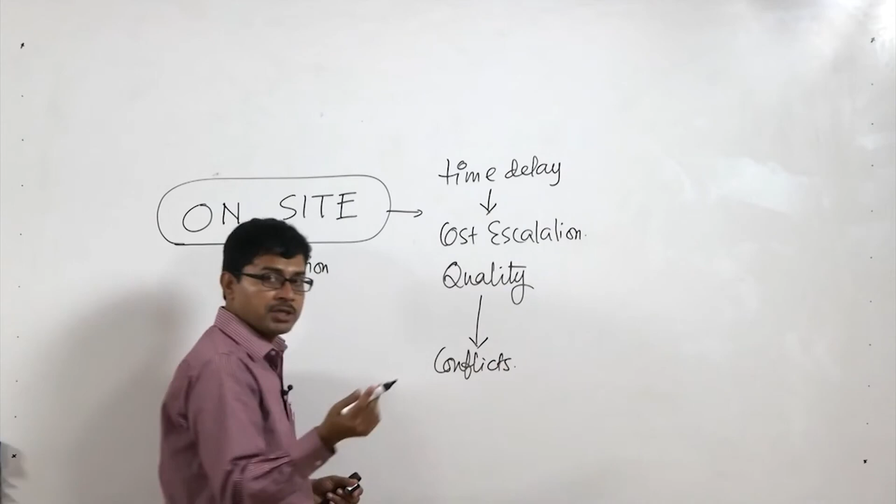Another very important part is that since it is site based construction, the quality of the product, the quality of the housing, is also compromised, because on site construction is based on the actual availability of labor and their skill level. So, these are the issues, and sometimes it also leads to conflicts between the end users and the developer, and dissatisfaction.

As a response to this problem, one of the solutions is to convert this on site activity to an off site model, where the major construction takes place in a factory in terms of building components. Every component of a house is manufactured at the factory under a given design prescription, and then transported to the site and assembled on the site.

And the major difference is that in on-site construction, some of the activities are not possible during the rainy season, and it is prone to weather. You cannot construct a house in a rainy season or in very extreme weather, but if it is off-site construction, then you do the manufacturing at the factory, and then you come to the site and assemble in a suitable, convenient time.

So, in short, you achieve the time, and if you achieve the time, the cost and quality. Why quality? Because if it is done at the factory, it is a standardized product, it is done in a standardized and more monitored process. So, it ensures the quality as well, and as a result there will be more satisfaction, and dissatisfaction will be resolved.

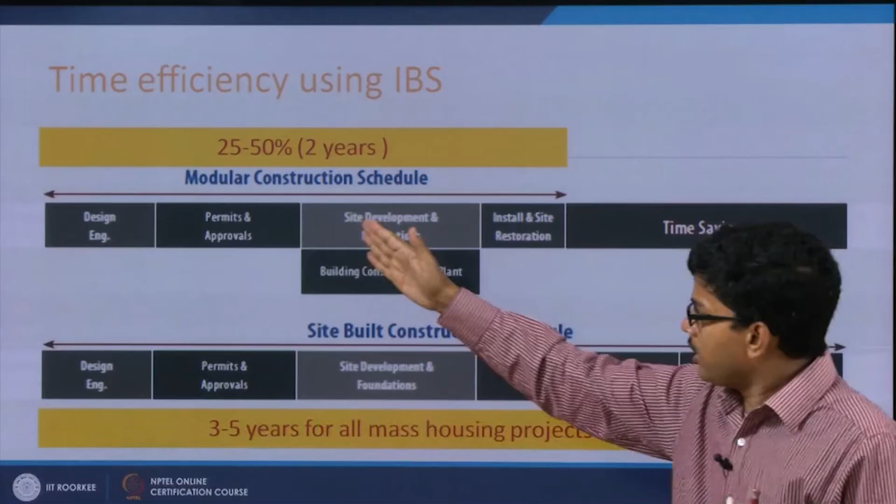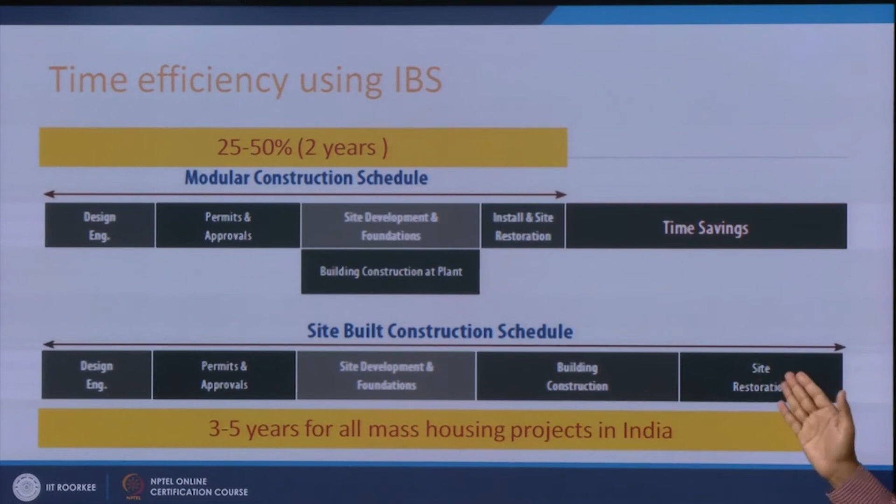So, the major advantage of this construction is basically the time savings. In a typical site-built construction schedule, you have the permit and approvals, then site development, then building construction and site restoration. Building construction and site restoration take a long time, basically 3 to 5 years in India, whereas in modular or off-site construction, you just need a little time to install and for site restoration.

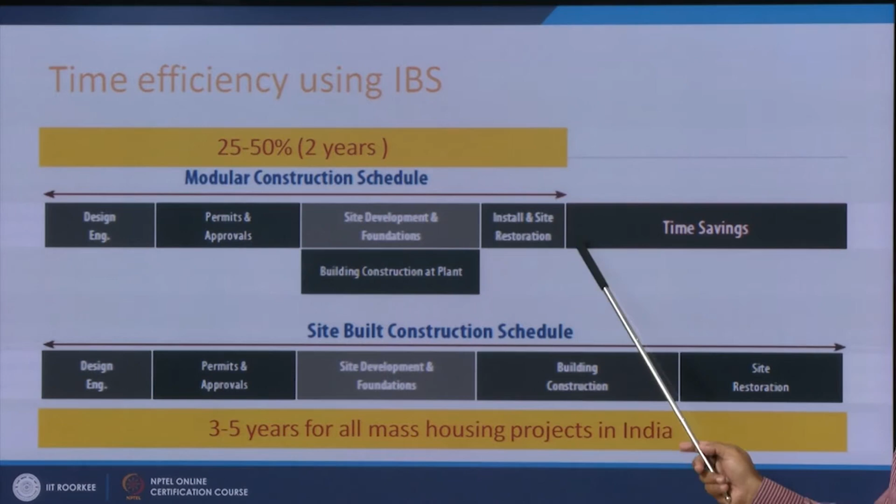So, this is the time savings for typical off-site construction, which we are calling an industrialized building system, which is nothing but incorporating the industrialized system at the off-site location or factory, and then bringing the product or component to the site and assembling it for faster delivery of housing. So, to understand in a better way how it works and what can be done for India, let us understand how it works technically.

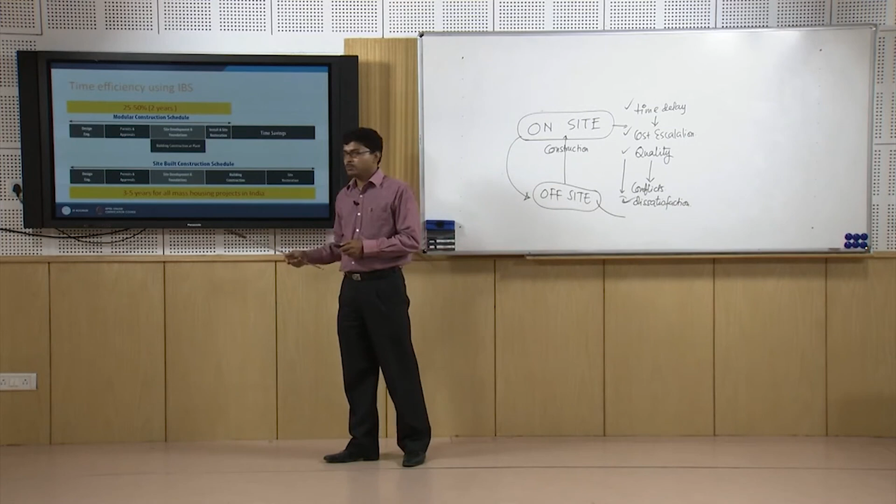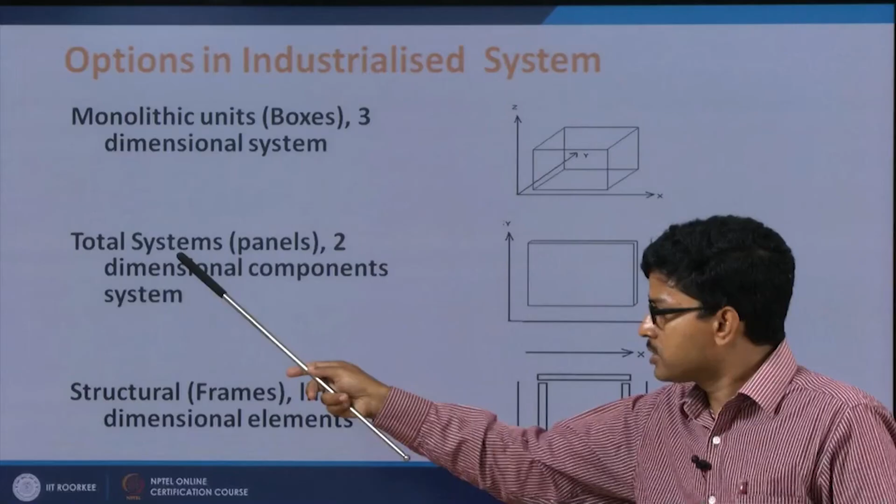Now, since housing is a building and a 3-dimensional object, it can be analyzed in 3 ways. One is that we consider each room or unit as a box, which is called the monolithic, box, or 3-dimensional system. Another approach is that to make an enclosed space, we consider each wall as a panel, which is called a panel system, and which is basically 2-dimensional if we ignore the thickness for convenience. It does not enclose a space fully, but multiple panel units can enclose a space in a better way.

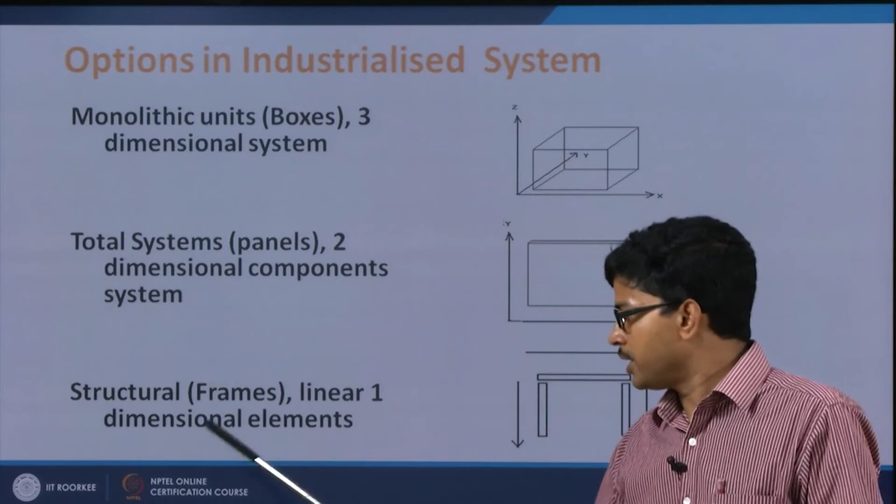And also the traditional way of constructing a house, with columns and beams making a structure, where multiple columns and beams create an enclosed space, which is called the frame system or linear system, basically a linear 1-dimensional component. So, in an industrialized system we can use any of these approaches based on our situation. Now, let us see which will be suitable or useful for the Indian case.

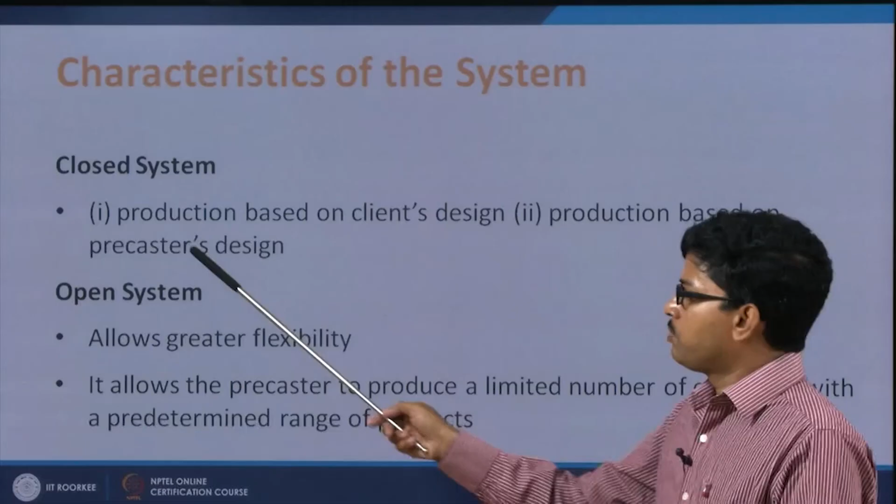Based on this system, there are two different characteristics which influence it: closed system and open system. In a closed system, the whole design, standardization and construction is done by only one provider or manufacturer. The production can be based on the client design, meaning a client provides a design and a manufacturer produces that housing from design to construction and delivers it to the client, or it can be based on the precaster's or producer's design.

Sometimes the developer, producer or precaster designs, constructs, manufactures and supplies a product to the market, and based on the market situation people can buy directly. So, these are closed systems. The characteristic of the closed system is, if I as a precaster or producer develop a module or product, no other company or manufacturer will be able to monitor, modify or enhance that product.

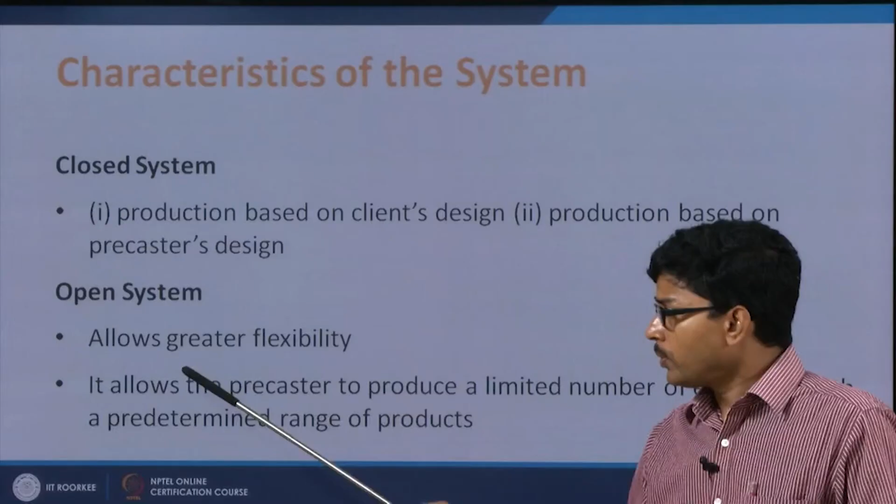So, it is closed to other agencies, whereas in an open system, on a common standardized platform, many companies can participate, give their products, and those products can be assembled.

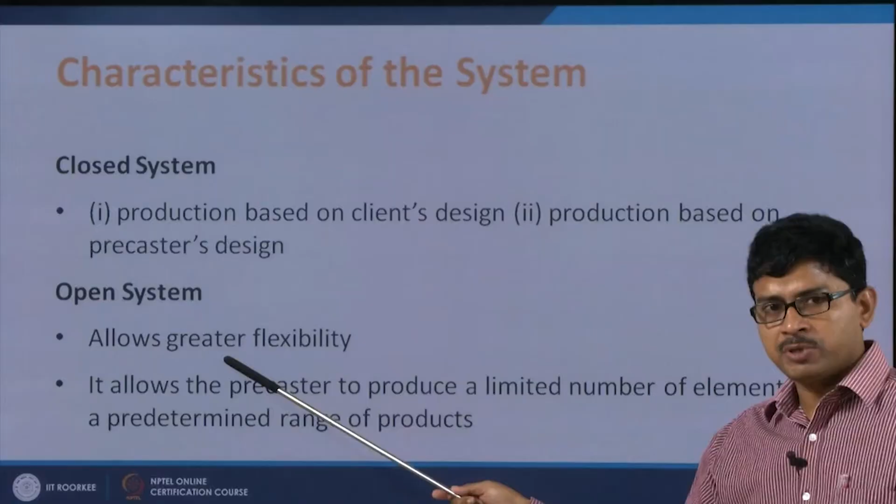It is like an assembled computer, where on the basis of a common format the components from various companies are assembled and integrated for a particular purpose. So the open system allows greater flexibility, and it also allows the precaster to produce a limited number of elements with a predetermined range of products, because the open system involves integration of multiple agencies, multiple manufacturers and producers.

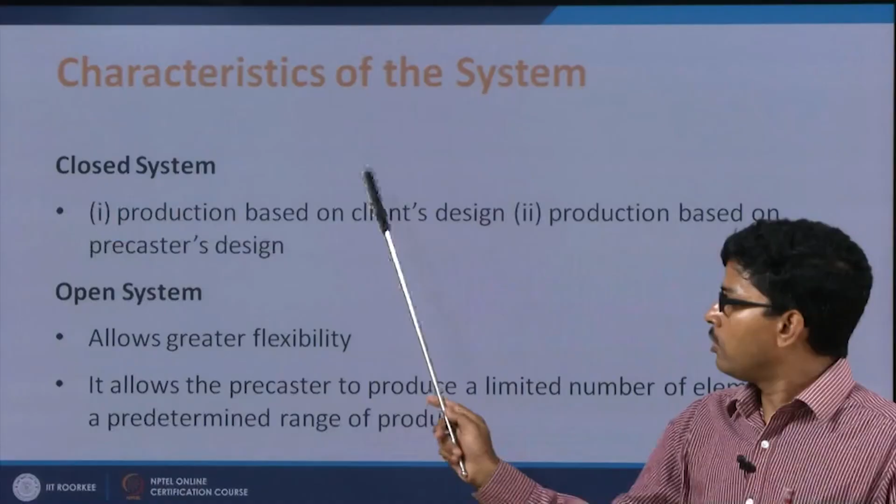So many numbers may not be possible, a limited number of options are possible, and compatibility is the issue, but the advantage of the open system is that it offers flexibility and it doesn't encourage a monopoly. But since the closed system is dependent on either the producers or the client, it encourages monopoly, and it is dependent on very few, one or two large developers or manufacturers. But in the open system many manufacturers, second category, third category, fourth category, small, medium, large and very large developers or producers can participate and develop housing.

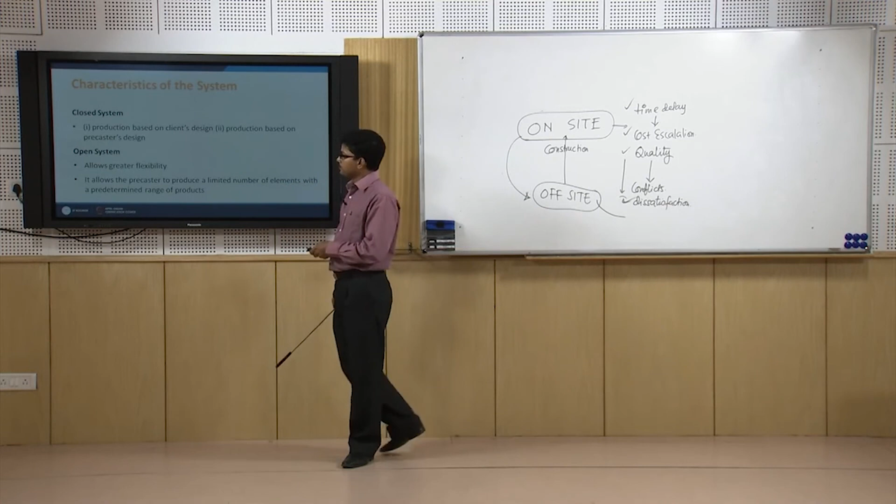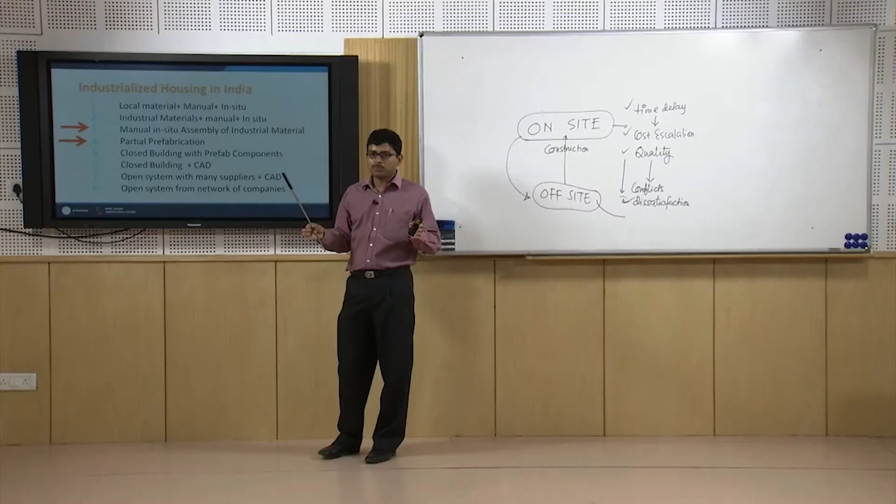Now, in an industrialized or offsite-based system, there are several stages required for a country like India. Initially we start from local material and manual construction on site, and then slowly we go to using industrial material with a manual process in situ. Then we move to manual in situ assembly of industrial material. That means the process is manual, but we are assembling industrial material. Right now in projects the overall process is manual and site based, but we are using some industrial materials, fixtures and finishing, like steel, plumbing fixtures, flooring elements, windows and doors, which are manufactured in industry. We are using them, but in a manual method.

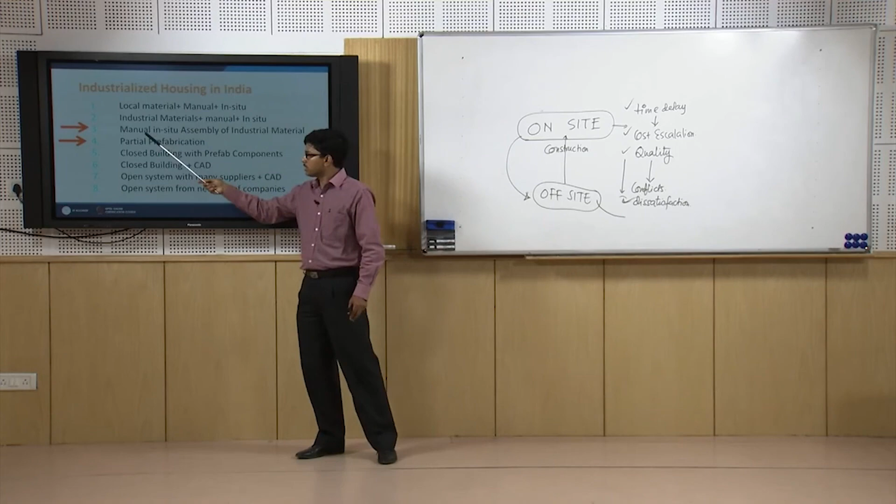The next stage will be partial prefabrication. Partial means some of the components, like walls, columns, beams or slabs, will be prefabricated, some parts will be done on site, and maybe fixtures and finishing will be done on site. So this is called partial. Right now we are in this position in India, which is a combination of manual labor, on-site construction, and some amount of partial prefabrication. We will show the example next day.

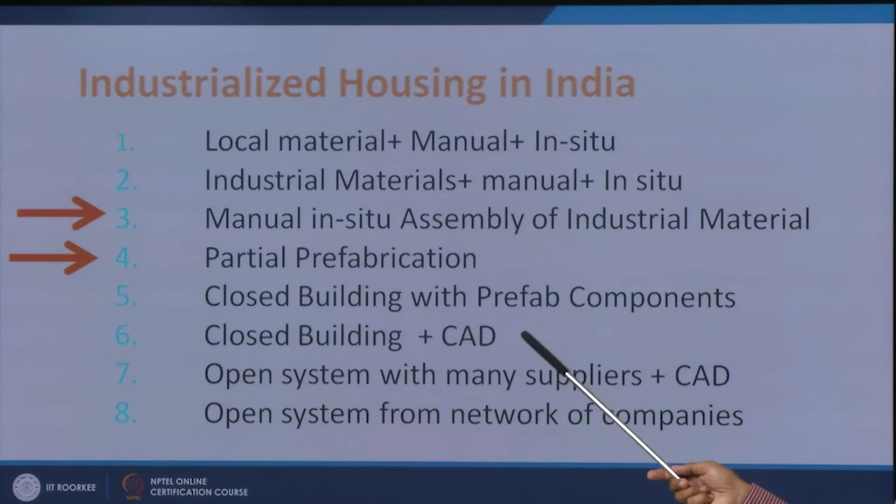The next stage is the closed building concept, or closed system with prefab components, where one, two or a few developers or producers can come forward and develop the whole package of housing in an industrialized mode. That means the whole houses will be manufactured in the factory, supplied to the site on time and assembled, and that is possible in the desired quality if done in a closed building system. The closed building system needs integration with computer aided drafting and design, which will lead to greater flexibility of the components integrated in a given platform and dimensional format.

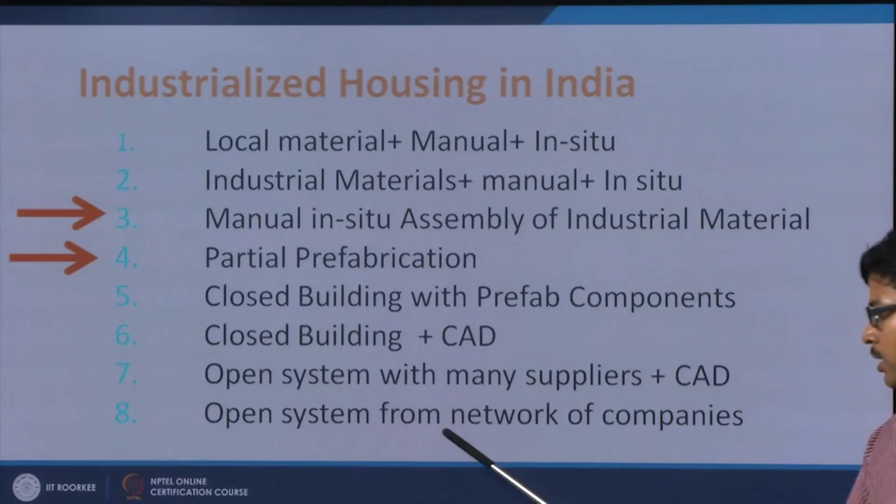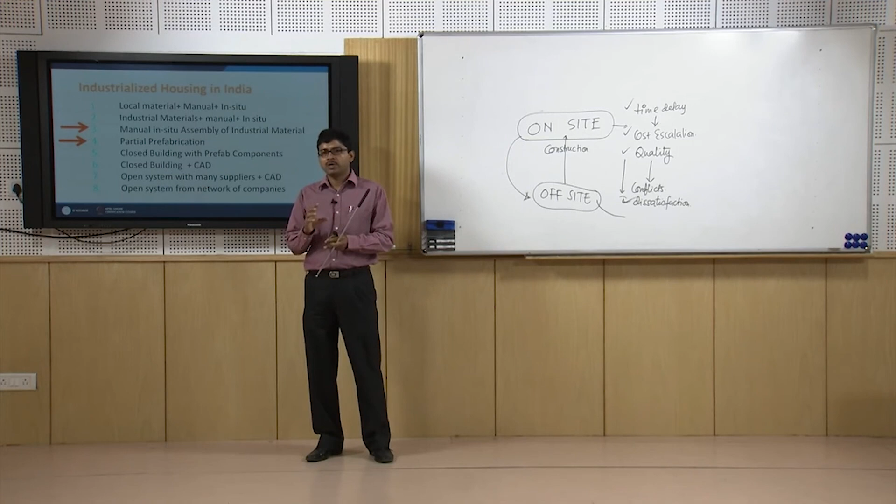After that, the open system with many suppliers, applying CAD across a network of companies, can be achieved. These are further stages which some countries have achieved. In these stages many suppliers and precasters work in the market, and various housing typologies are available that need no more than 2 to 3 months to execute on site, and they are cheaper, affordable and very quickly constructed housing options.

But what do you need to have this industrialized building system? There are various prerequisites - some of the prerequisites are on site, some conditions required are off-site, which is beyond the boundary, and some are prerequisite policy.

I start with the policy parameter. To enable this kind of construction we need availability of bigger land. Sometimes we are talking about mass housing, and for mass housing bigger land is required. So if we change the technology from conventional to new technology, land is a very important input. Then there's the private investment possibility - there are very few developers interested to invest in the prefabricated or industrialized technology.

So private investment is required, and for that we need a policy paradigm by the government. Right now the present government is encouraging the industrialized building system and the prefabricated system largely. There are various developers coming forward to invest in this sector. I will give the example later on.

Whenever there is a change of technology, there is a need for quality control. For this quality control we need building codes and an inspection mechanism to ensure quality. So a new set of building rules, building codes, and a new control mechanism needs to be developed.

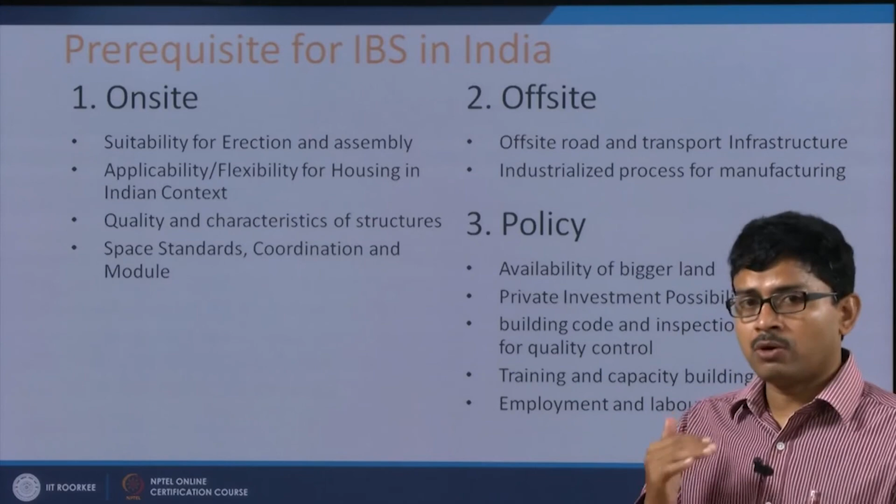Quality and characteristics of the structure should be durable against all weather effects - the hot season, winter season and rainy season. It should be able to withstand natural disasters like flood and cyclone, and seismic threats. So it should be durable considering all the major threats.

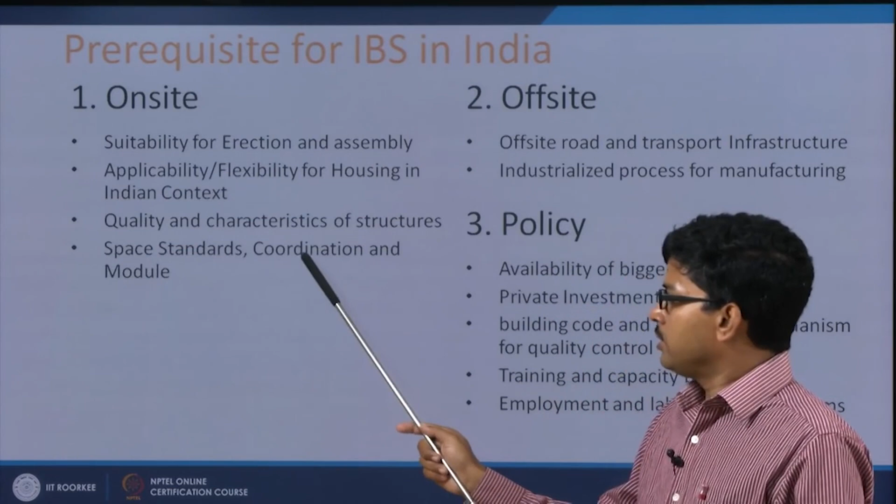Also space standards and dimensional and modular coordination - the developed module will be contextual for that particular city, zone, or target group. This is basically the area-specific or site-specific requirement, like the specific space standards.

For example, the dimension of a room or any module for an area in plain land may not be equal with other land. The dimension of a house in a tribal land may not be equal to the dimension of a house built at the city core area.

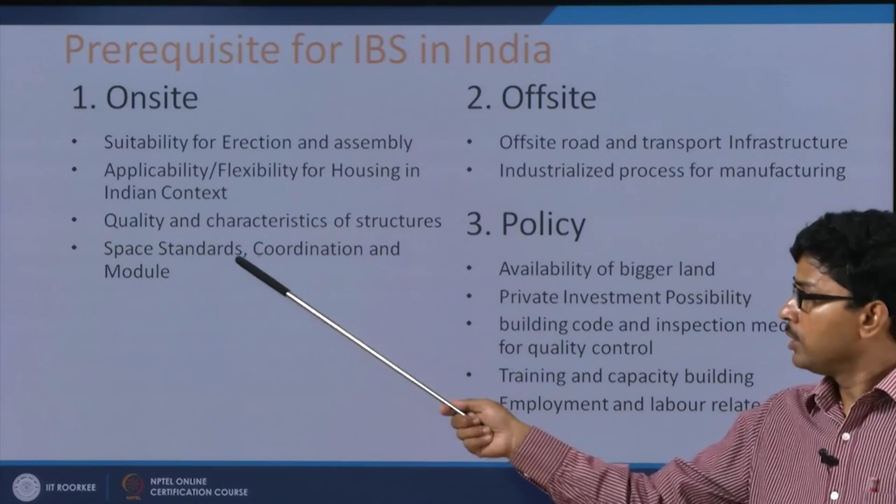So depending on the context, the target group, and the geographical location, we may have to vary the space standards and the coordination between these space standards and their modules. In short, the on-site, off-site and policy parameters are very much required to bring about a change over of technology from one system to another.

So the progress in India - till last decade there has been a lot of experimentation of building products like flooring, walling and roofing elements. But in spite of all those experiments and attempts, we could not achieve a total technology transfer or total technology change in India in the mass housing sector. It was limited to laboratory experiments with some pilot demonstration projects.

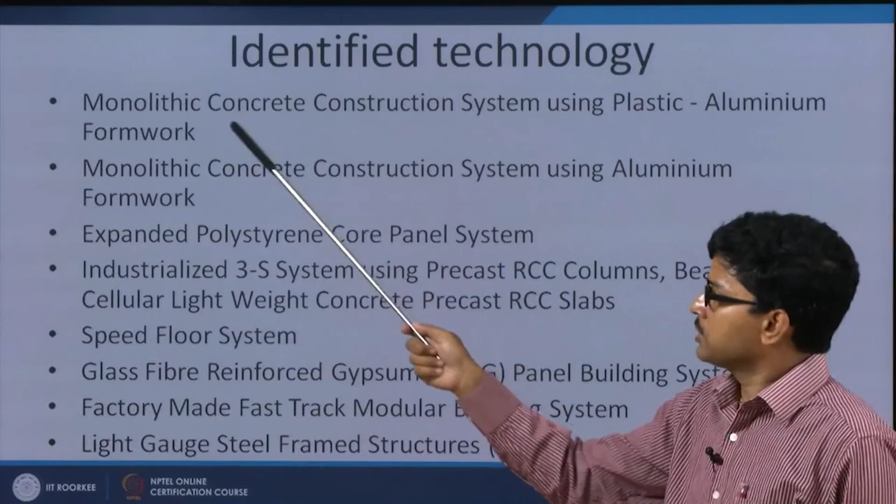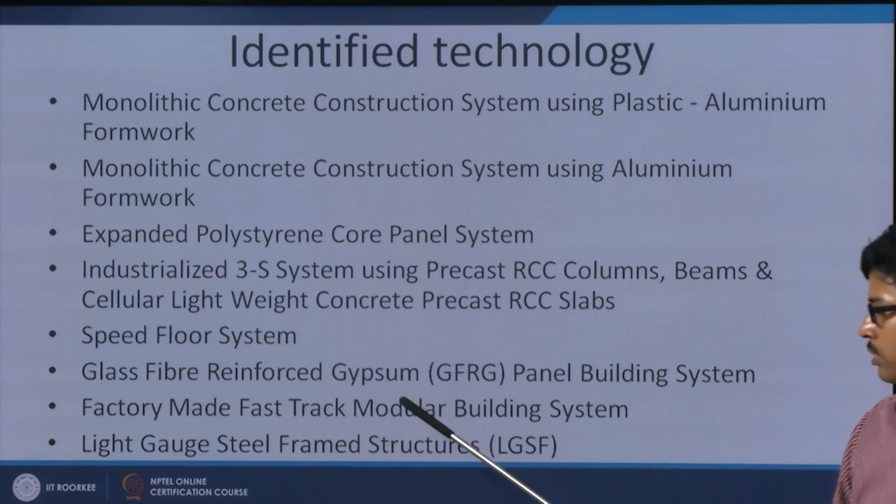But right now there is a big thrust by the Government of India after the National Housing and Habitat Policy, and with the current Pradhan Mantri Awas Yojana there is a sub-mission called the technology sub-mission. Under this, government has identified many technologies to transfer construction from on-site to off-site, including monolithic concrete construction, expanded polystyrene panel system, 3S system, speed floor system, GFRG panel system, modular building system and light gauge steel framed structure.

Next day we will show some case studies in the Indian situation where large scale mass housing construction is possible using some of these technologies. But most of these technologies are under development in research laboratories, including IITs and central research laboratories. So after 5 or 10 years, these technologies will be able to deliver housing in a faster, speedier way, and as a result it will reduce the cost of building to a great extent.

So with this we summarize today's discussion. Today we discussed technology systems, which is basically a supply side intervention, because to change a technology from on-site to off-site.

Technology can reduce the cost of a housing project substantially, because if we change from on-site to off-site, we get the advantage of time, advantage of cost, advantage of quality, and advantage of user satisfaction. But it needs several prerequisites - on-site prerequisites, off-site prerequisites, and policy prerequisites.

And as a system, it has three different kinds: box system, panel system, and linear system. It also has two different characteristics: one is an open system and another is a closed system.